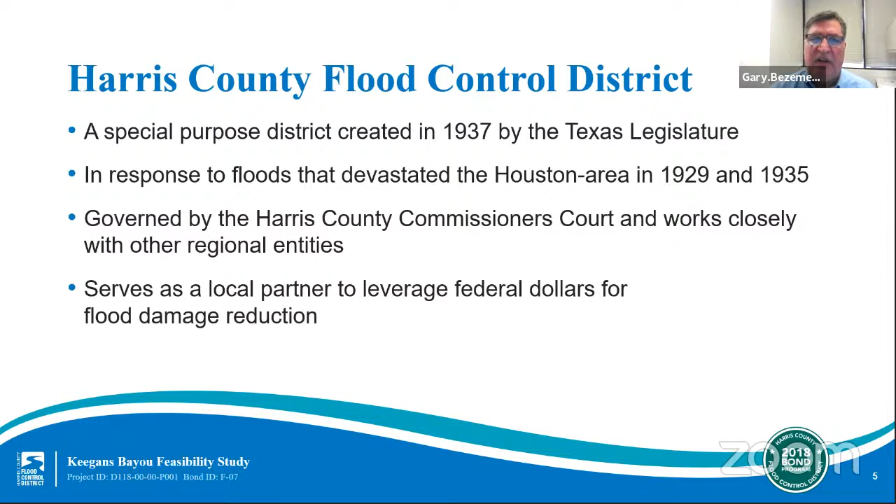The mission of the Harris County Flood Control District is to provide flood damage reduction projects that work with appropriate regard for community and natural values. One of the most difficult challenges we face is constructing effective projects that are sensitive to community and natural values in a highly urbanized area.

Harris County includes 22 main watersheds, totaling approximately 1,800 square miles and more than 2,500 linear miles of channel. 2,500 miles is approximately the distance from New York to California. A watershed is a geographical region of land that drains to a common channel or outlet. Each watershed has its own unique characteristics and needs. The project we are presenting tonight is in the Brays Bayou watershed, located in southwest Harris County.

Harris County is flood prone. Here are some reasons why our area floods. Our area experiences extreme rainfall, including tropical storms and hurricanes. Our area is flat with slow draining land, and the underlying soils in much of our area are clay soils that do not soak up excess rainfall quickly.

While the Flood Control District plays a critical role in flood risk reduction, we are one of several entities involved in these efforts in our region. When rain falls on your roof, it flows through several jurisdictions, such as streets and drains managed by the Harris County Engineering Department, a municipal utility district, or a city, such as the city of Houston, before it flows into a larger channel, creek, or bayou that the Flood Control District owns and maintains.

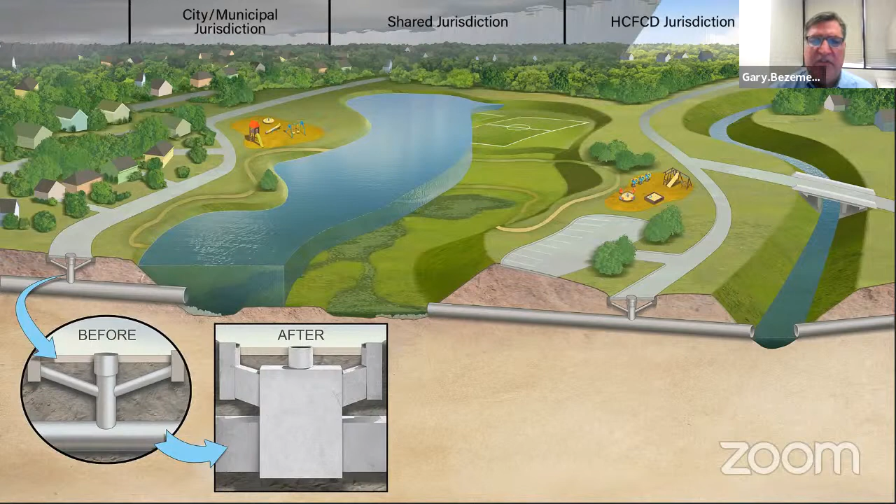On August 25th, 2018, Harris County voters approved $2.5 billion in bonds for flood risk reduction projects. This vote followed a series of meetings across Harris County in each watershed, which resulted in a list of what is now 181 bond projects. As of August 2021, all 181 projects have been initiated, including 10 of the projects in the Brays Bayou watershed.

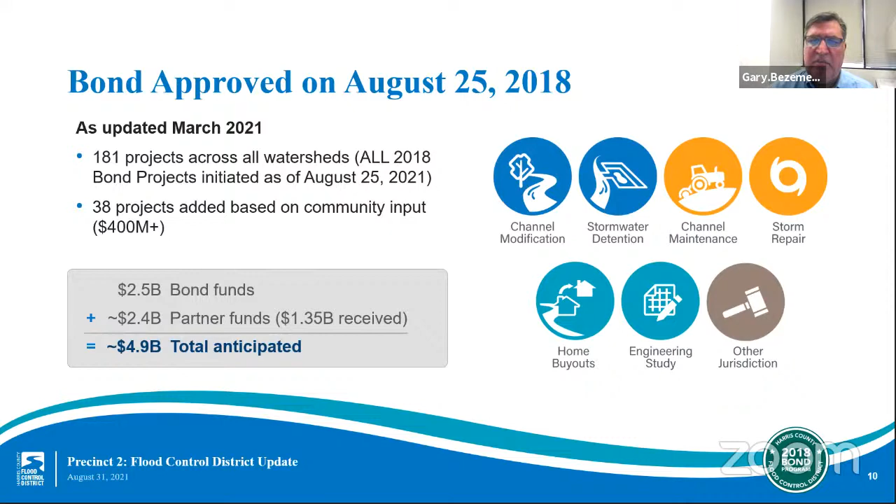A total of more than $1.35 billion in partnership funding has been secured so far to stretch the 2018 bond program even further. The actual timing of each individual project will depend on a variety of factors, including environmental permitting, right-of-way acquisition, and utility relocation, and in some cases, requirements of a particular grant. That said, project lists and projected schedules are updated regularly on our website.

While the bond was for $2.5 billion, the full cost of every project in the bond tables is almost $5 billion. So we made it clear from the outset that we would need funding partners to fully construct the projects in the bond program. As I mentioned, we've had some success so far, having secured more than $1.35 billion in partner funds. This graphic illustrates the many sources of those partnerships, including federal, state, and local funding that the Flood Control District is working to secure for Harris County.

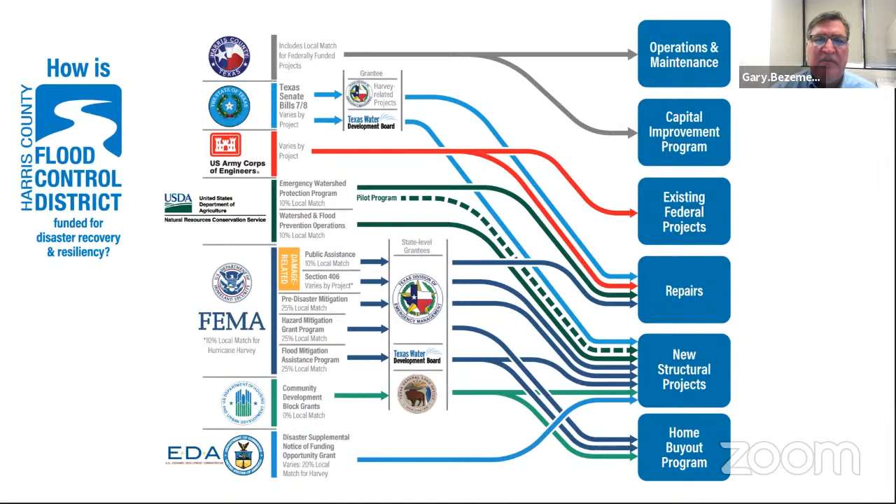Each agency has its own definition of eligible projects and its own requirements for local match funding. So the Flood Control District works diligently to match projects to the right partnership opportunities. We will now move into the part of the program that is specifically about the Brays Bayou watershed and the Keegans Bayou feasibility study.

The Keegans Bayou feasibility study goals and objectives were shaped by historical flood records and community feedback. The main goal of the study was to identify flood-prone areas and their respective causes of flooding. There could be more than one cause of flooding, so our job is to correctly identify them to recommend appropriate short-term and long-term solutions. The sum of the recommendations and their phasing plan is what we call the feasibility study plan.

We studied the entire Keegans Bayou subwatershed, which makes up 19 square miles. We modeled all open channels, which includes the entire Keegans Bayou main stem channel, shown on the map in red, as well as 8 tributary channels, shown on the map in yellow.

Based on our observations of the historical flood records, physical attributes of the terrain and the channel network, and the results of the models developed for the purposes of this study, we noted several areas of concern. First, there are multiple areas, sometimes spread across entire neighborhoods, with documented historical flooding. The largest concentrations of historical flooding are identified in purple line work.

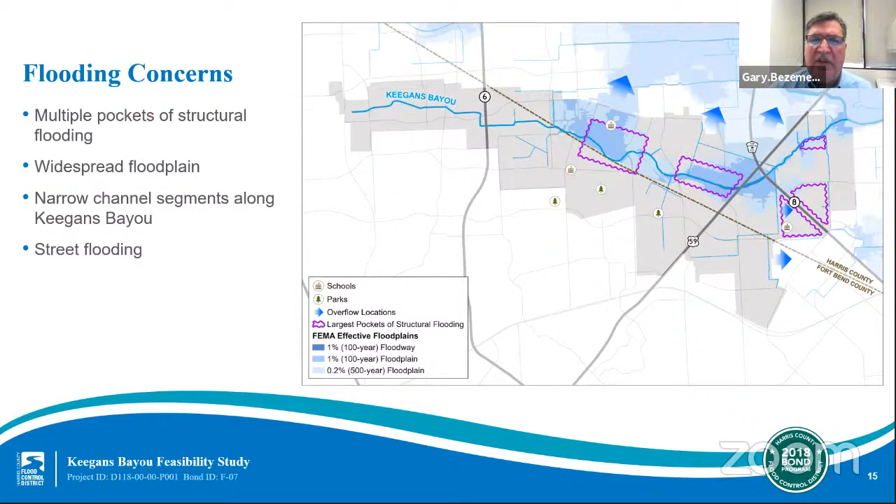Second, the floodplain of Keegans Bayou is widespread, and there are areas where water leaves the subwatershed and enters neighboring watersheds. In doing so, the water sheet flows across some Keegans Bayou neighborhoods and causes flooding. Third, there are segments of Keegans Bayou that have low capacity, and this causes riverine flooding when Keegans Bayou spills out of its banks. Lastly, we noted roadway flooding is often deep and causes impacts to mobility.

Our model results were calibrated using the known records at 3 rain gauges on Keegans Bayou for multiple storm events. We then used the results of the models to determine the channel capacity for all channels that we modeled.

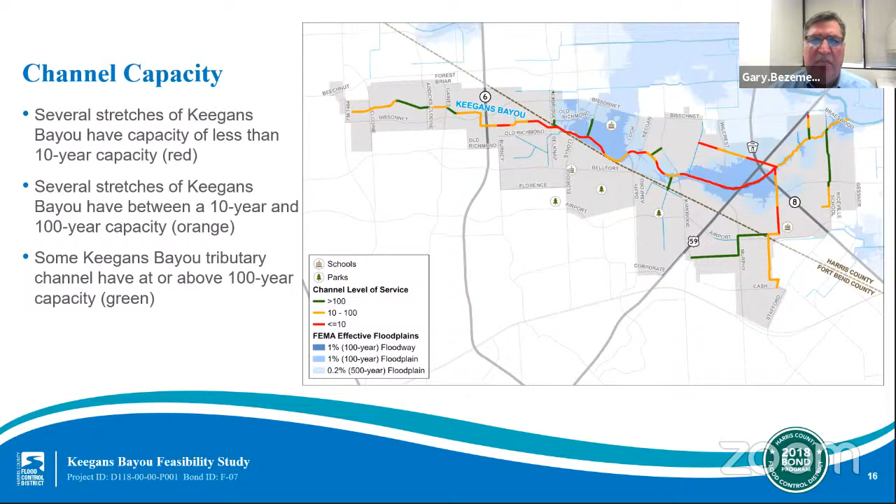Channel capacity is defined as a measure of a channel to carry flow before spilling out of banks and flooding areas. The channels with the best capacity are represented by the green color, and the channels with the worst capacity are shown in red. We noted several segments of Keegans Bayou that lack capacity, including the large segment near the Beltway and US 59. We also noted that several of the tributary channels have the capacity to carry the flows they are intended to, and therefore increasing their capacity would not be recommended in attempting to solve the nearby flooding issues.

To tackle the flooding-related issues described on the prior slides, we identified 6 study areas to be evaluated in detail to determine their potential to reduce flooding.

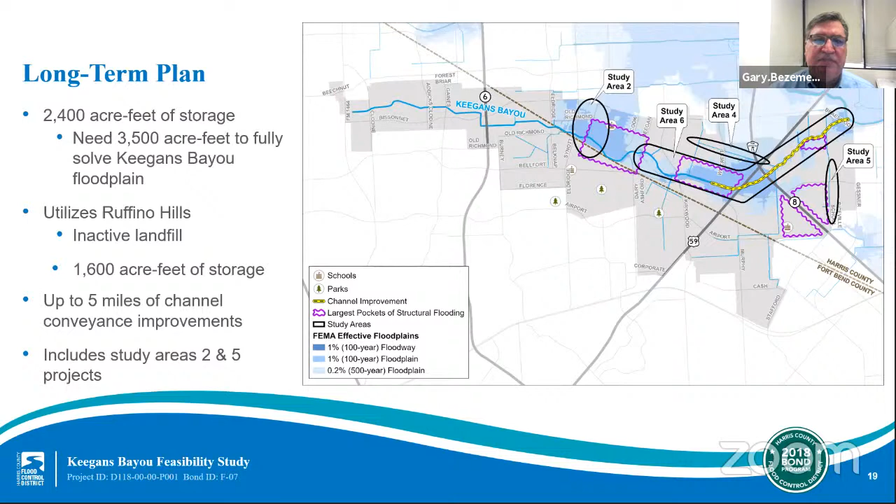This is the potential benefit map for the feasibility study plan, showing the potential benefit of accomplishing 5 miles of channel improvements and completing the other complementary project elements such as additional stormwater detention basins and storm sewer lines. We are looking to achieve 2,400 acre-feet of total stormwater storage. In comparison, to solve the entire Keegans Bayou extreme event floodplain, we need 3,500 acre-feet.

With the feasibility study plan fully realized, the likelihood of flooding is significantly reduced for an estimated 1,637 structures, shown here in red. Significant additional structures benefit by seeing a reduction in depth and frequency of flooding, and those are shown here in yellow. The benefit of the feasibility study plan is sizable and widespread across Keegans Bayou.

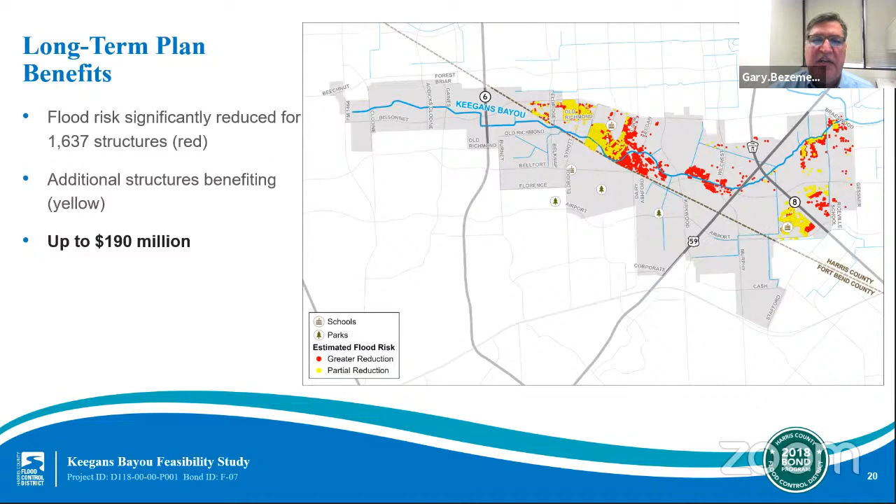While the feasibility study plan largely depends on Ruffino Hills, the Ruffino Hills conversion into a stormwater detention basin, if this is not realized, we developed an alternate plan that relies on 850 acre-feet of storage. Therefore, if Ruffino Hills is not feasible and we proceed with the alternate feasibility study plan instead, flooding would be

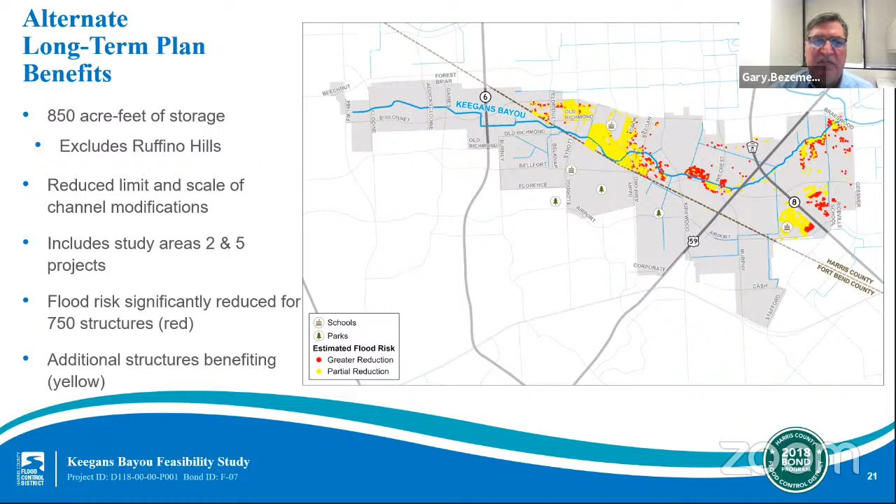significantly reduced for up to 750 structures, shown in red on the slide, and additional structures would benefit, seeing a reduction in depth and frequency of flooding, as shown here in yellow.

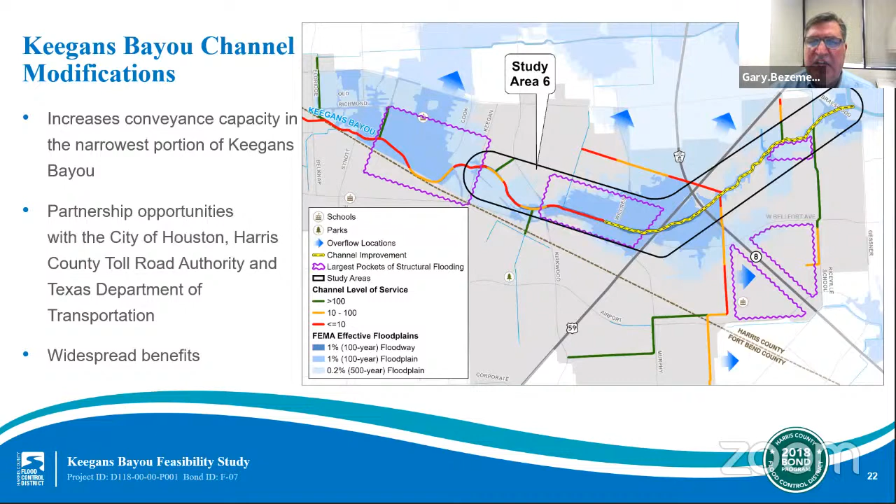The largest of the 6 recommendations and the most impactful part of the feasibility study plan is the Study Area 6 project. Study Area 6 includes widening the main Keegans Bayou channel from east of Beltway 8 to upstream of Wilcrest. Here's a close-up view of the benefited area. The flood risk is expected to be significantly reduced for 700 structures, shown in red. Additional structures benefit from reduction in depth and frequency of flooding, marked in yellow.

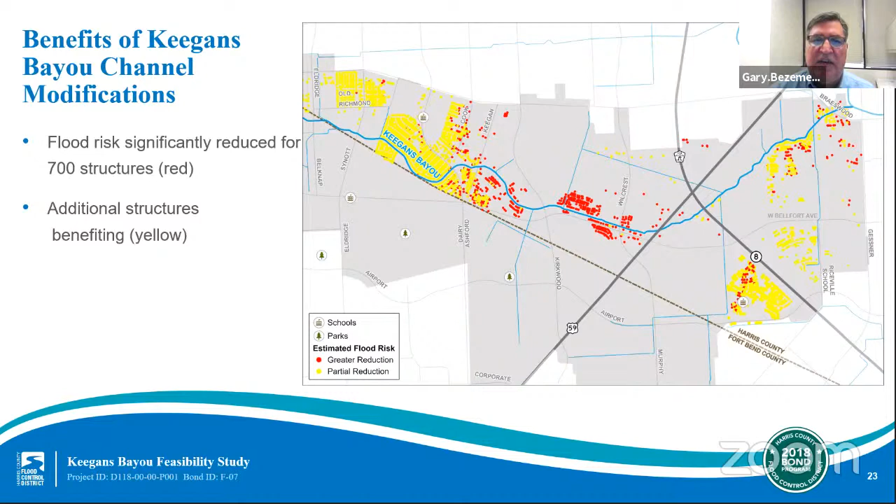The Study Area 1 and 2 projects explore the potential benefits of providing stormwater detention basins for safe storage of floodwaters to reduce the risk of flooding between Eldridge and Dairy Ashford. Our exploration concluded that Study Area 2 is more beneficial than Study Area 1, and thus it serves as the westernmost recommendation of this study. The Flood Control District already owns some land that can be incorporated into the Study Area 2 project and can also utilize a parcel of land belonging to the Texas Department of Transportation. This project also allows for partnerships with the City of Houston. If the city were to improve neighborhood drainage, they could use storage from the stormwater detention basin proposed as part of Study Area 2 for mitigation of drainage improvements.

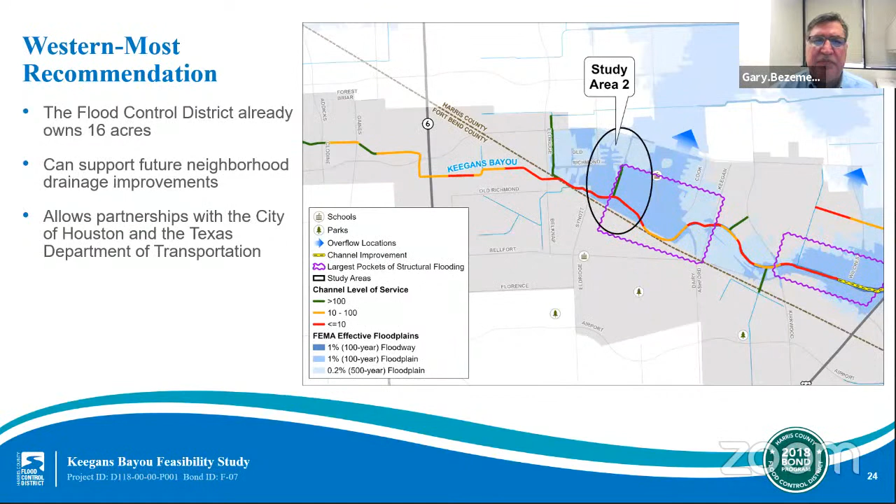Here is the close-up of the Study Area 2 project and the estimated benefits. We estimate that up to 400 acre-feet of detention could be realized at this location, providing a significant reduction in flooding risk for up to 267 structures, shown in red. Additional structures also benefit by seeing a reduction in flooding depth and frequency, shown in yellow.

The total estimated cost of achieving 400 acre-feet of detention is $33 million. However, with the land we already own and being adjacent to the TxDOT parcel, we can achieve 130 acre-feet of detention and remove floodplain from up to 126 structures at an estimated cost of $14.2 million. This shows that the plan for the area is flexible. Not all the assumed stormwater detention basin storage has to be achieved in order to build a project that is beneficial.

The study areas 3 and 5 projects explore the potential benefits of providing stormwater detention basins for safe storage of extreme event sheet flow or overland runoff caused by the sloping terrain, to reduce or fix the concentrations of historical flooding located here. Both study areas are adjacent to the Beltway and near Bell Elementary School. Due to existing topography, adding regional detention in Study Area 5 was more effective than Study Area 3, and thus Study Area 5 serves as the easternmost recommendation.

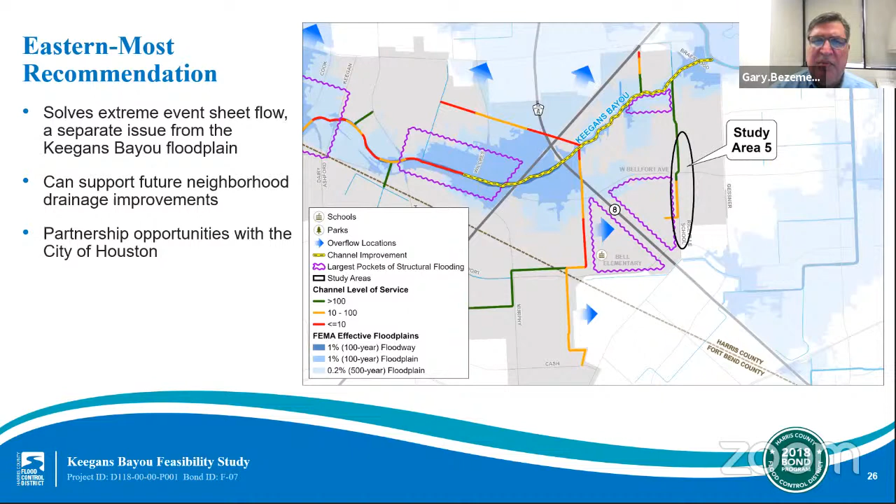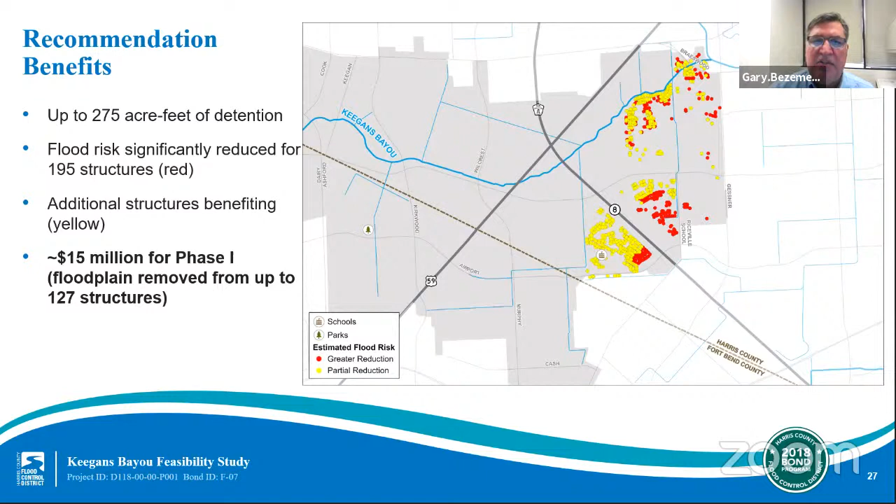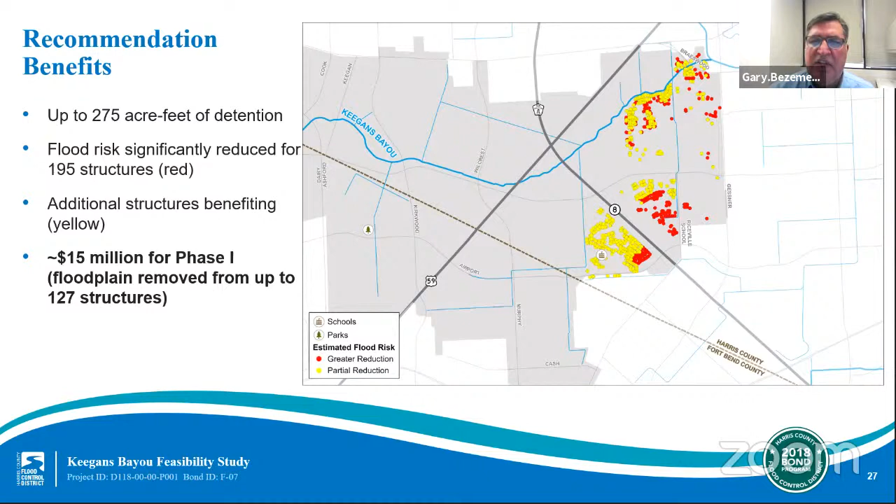Here is a close-up view of the benefited area. We are aiming to achieve up to 275 acre-feet of detention, which would significantly reduce the flooding risk for up to 195 structures, shown here in red. Additional structures are benefited by seeing a reduction in depth and frequency of flooding, shown in yellow. While the total cost of the project is above $30 million, we have the flexibility to build a phase 1, resulting in 100 acre-feet of detention and flooding risk significantly reduced for up to 127 structures.

As for the next steps, it is recommended to pursue projects in the feasibility study plan, as well as acquisition of right-of-way based on funding and opportunity. All projects selected for the feasibility study plan add value and work together to provide significant benefit to the Keegans Bayou communities. Specific to this feasibility study effort, Study Areas 2 and 5 are ready to move into preliminary engineering to be further developed. They were found to deliver considerable flood protection benefit, and phase 1 of both projects can be funded through construction using the available bond program funding of $30 million.

Additional funding is required to realize all projects that comprise the feasibility study plan, and additional funding opportunities will need to be explored. I will now turn the program back over to Sheldra to kick off the question and answer session.

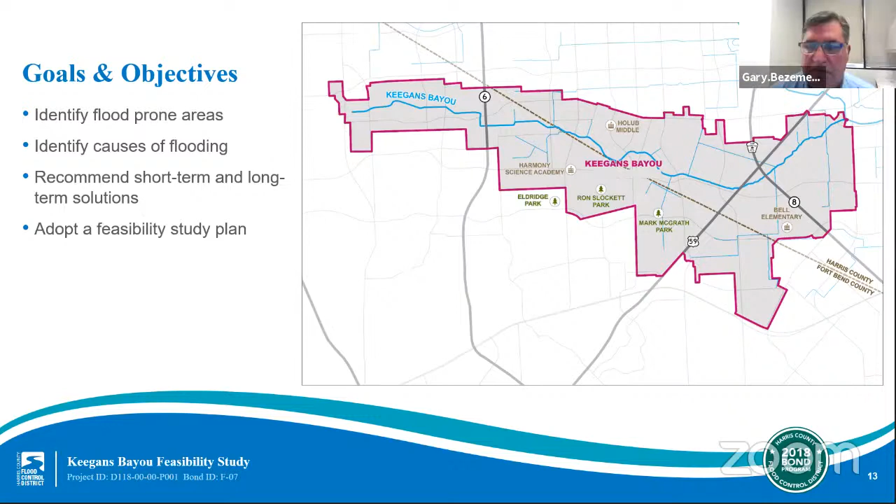Well, we are immediately moving the recommended projects over to our PER team. So as far as how long before the project starts, if you consider the PER and design and all that, we're starting immediately. But we still have to go through the preliminary engineering where we start the design process, look at what's on the ground and how we would construct, and then ultimately get any permitting taken care of and finalize.

So we're probably looking, and Dina might have a better timeline for this, but we're probably looking at about 2.5 to 3.5 years before we would start turning earth. Now, in the case of property we already own, some of those projects will move a little quicker, but in areas where we're having to acquire property, it's probably in that 2.5 to 3.5 year window.

That's right, Gary, that's a really good approximation. Because as you touched on, we do need to go through the steps of preliminary engineering and design, and during those steps we gather a lot more detailed information, such as geotechnical engineering, detailed survey data, and really detailed information about some of the utilities in place out there, just to make sure we know what's actually in the ground and how we can put the best design forward.

And then we start working on any of those potential conflicts. Especially utilities can be a big one there, we want to make sure we're not having any conflicts with existing utilities and causing interruptions to services with the neighborhoods. So it takes a lot of work up front to be able to actually prepare those detention basins and get them constructed and in the ground. But this is certainly a very important project to us, and we are moving it forward quickly.

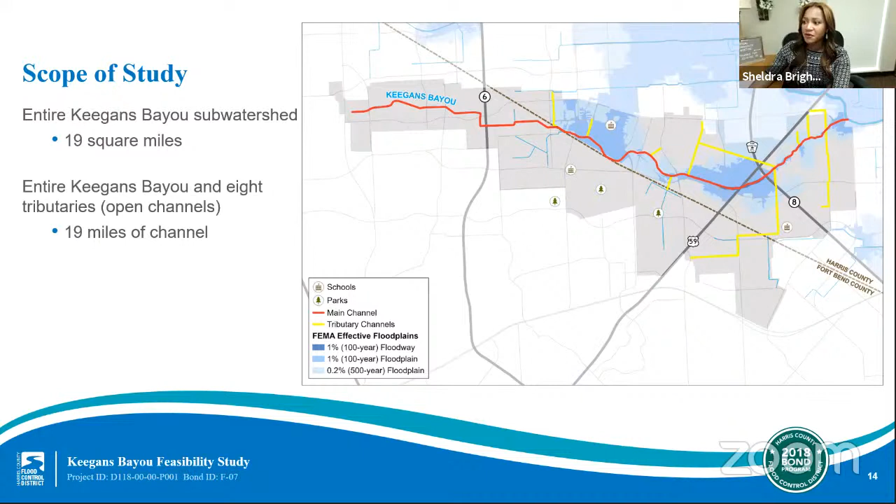Thank you, Nasiha. Next question is for Gary, from Wayne: if Ruffino Hills is further studied, what would be the schedule for the study to occur?

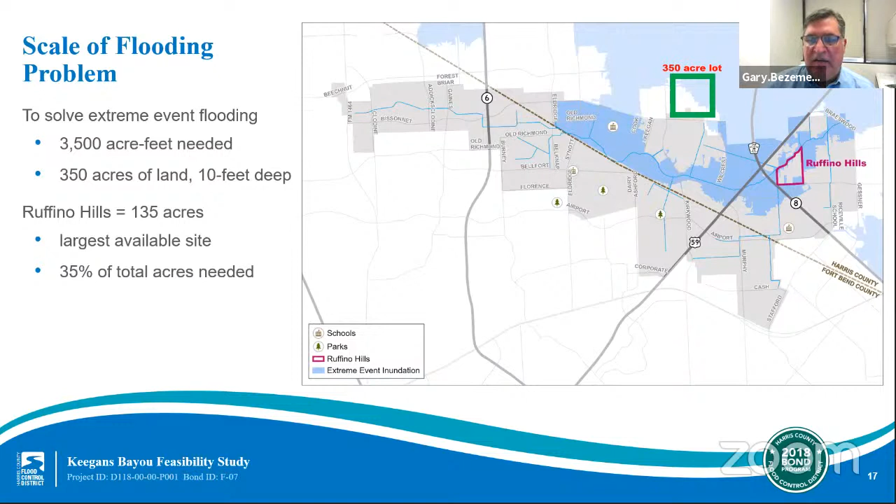I'll ask Nasiha to help fill some of that in. We're still pretty early on at the Ruffino Hills site—there's still a lot of environmental work that needs to happen, a lot more testing and things. In the feasibility study, we looked at if we were able to obtain the footprint that the Ruffino Hills site is on, what we could do from a flood damage reduction perspective—how many homes could benefit—and we presented that in the slides. But there's still a lot of work needed to determine things like relocating the landfill so we'd have the detention area, and all those steps still need to happen.

What we scoped into our study effort was basically to look at it hydraulically—if it were feasible, how much benefit could it provide. The reason for that is we didn't want to duplicate work already taking place by a different agency. This site is being seriously evaluated for environmental impacts; the City of Houston is doing borings and collecting data to look at the feasibility of converting it into a detention basin. From our end, we were providing the hydraulic numbers—if we can get this much detention, then we can do this much channel work to accompany that and provide flood reduction benefits. So a lot more work is going on behind the scenes by the City of Houston, and those results are pending.

Got a couple of comments to share. First, from Mr. Verma: the Keegans Bayou feasibility study team has conducted this task methodically. His comment is that the current allocation of funds from the bond should be used to buy the required land and right-of-way for future flood control projects on Keegans Bayou. We appreciate that. Also had a comment from Stephen with Neighborhoods to Trails Southwest, saying their organization would be glad to work with Harris County Flood Control District on dual-use aspects like trails. Thank you for those comments, please keep them coming.

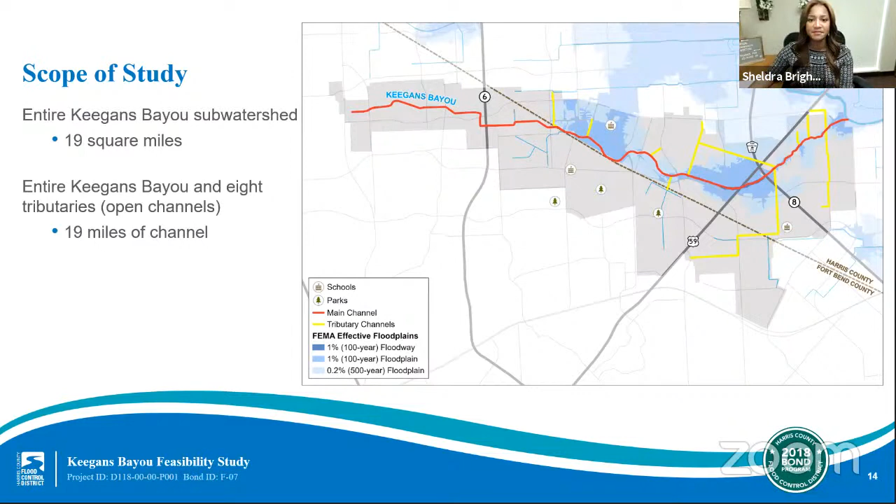Please keep those comments coming in. Our next question is for Dina. Just to give folks some background, can you explain exactly what a feasibility study is and how it works? Sure, absolutely. Let's pull up the slide here.

So when you saw some of those maps earlier that Gary was showing, with a lot of inundation in different neighborhoods, we start investigating those types of things. We also go back and look at data such as flooding records or complaints we've received for those neighborhoods. We talk to folks who work out there to really understand what's going on, then start looking at the physical aspects that contribute to the flooding, doing a lot of data collection. A lot of engineering goes into the hydrology and hydraulic calculations to simulate what happens with different storm events moving through town.

How does water tend to pool and collect in these neighborhoods? Is it able to make its way into the storm sewer network? Is it able to make its way into the channel systems? If not, where's it getting stuck? Is the flooding coming from overland sheet flow issues we touched on earlier, or is it because of the conveyance capacity along the channel? We look into those different aspects of the flooding in the area.

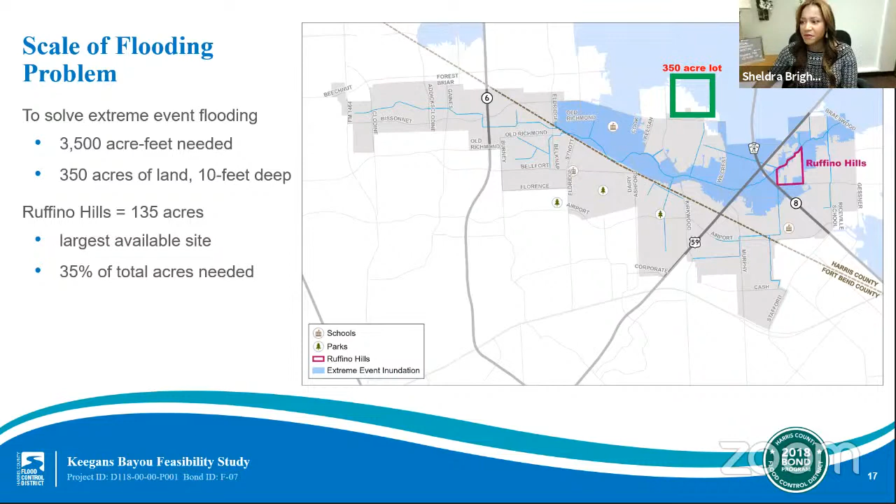Thank you, Nasiha. Gary, wondering if you could go over next steps for us again, for folks who may have joined us late and didn't get a chance to hear that portion.

Sure. Next steps: we're really wrapping up, probably in the next month, our feasibility study. That means we're putting our final report together, documenting our feasibility study plan, and documenting all of the alternatives we have evaluated. As part of that, there's a recommendation for 2 projects to move directly into preliminary engineering.

Those are projects 2 and 5 that we presented on today. For reference, project 2 is on the western portion of the watershed in Harris County, and project 5 is more on the eastern side.

Both of those evaluated projects are ones where if we can build the detention—in the case of project 2, we already own property out there and would like to expand the footprint. In the case of project 5, we would need to acquire some property. But both are projects where the more land we can get, the more benefit we've determined we can hold.

So we can start immediately, and for almost every scoop of dirt we take out, there's benefit we're going to realize. Those projects were identified as immediate.

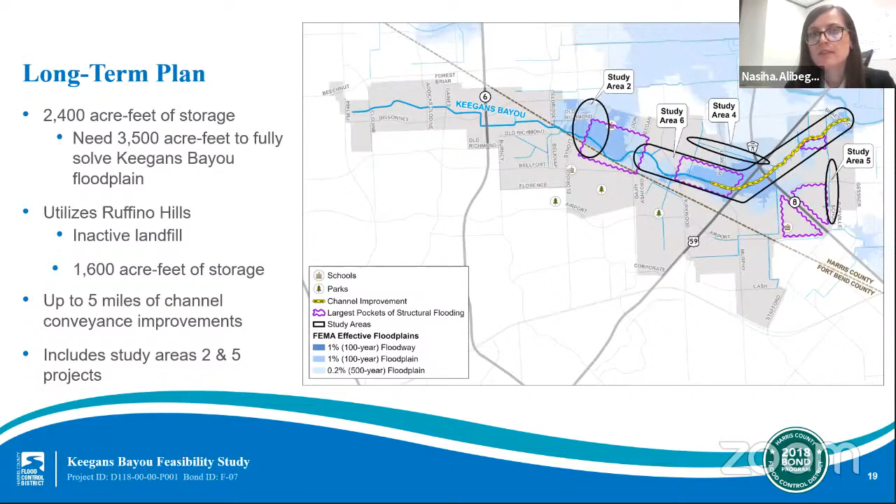So we have another question for Nasiha: what is the total funding needed to construct the entire feasibility study plan? We estimate 170 to 190 million. The reason for that variability is the uncertainty around the Ruffino Hills. It's estimated right now, based on some preliminary borings, that most of that waste is municipal waste and relatively easy to handle the cleanup of the site. But because of that uncertainty, there's some variability in the cost, so the price tag is pretty large.

Good deal, thank you Nasiha. Next question is for Gary: can you recap the 6 study areas again for us? Yes, I'll do my best. So study areas 1 and 2, as you can see on the graphic, are in the western part of the watershed. Study areas 3 and 5 are on the eastern portion of the watershed, and study areas 4 and 6 are kind of right in the middle. Study area 6 is really the biggest component of the study area projects we looked at, entailing channel improvements and modifications along the main stem of Keegans Bayou.

That's the project that requires a large amount of detention storage. So what we're really doing there is trying to pull in the floodplain and provide more capacity along the main stem on project area 6. But in doing that, we cannot push more flows downstream that could potentially flood somebody, so we have to pull the water into the channel with the bigger capacity and then store it somewhere. That's probably the biggest project out there.